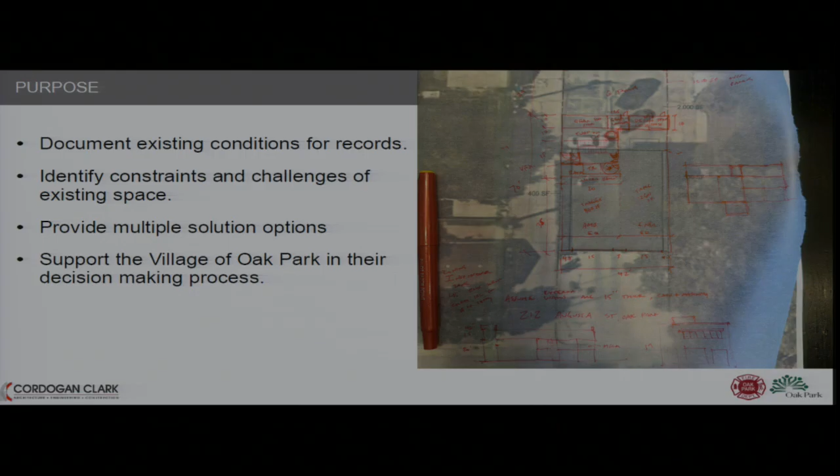Initially, the purpose really was to document the existing conditions of the building, to identify constraints and challenges of the existing space, and to look at multiple solution options, whether it was renovation, tear down, new construction on site, or new construction on a different site. Ultimately, the whole goal was to provide a list of options for the village to make their transparent decision on how they wanted to proceed.

Just a quick overview of the process. We came on board late last year and have been working with the village team and the fire department.

We started with a series of site visits of the existing building. We put together a questionnaire that was distributed to the fire department and some of the village team to get some initial feedback. Those questionnaires were then followed up with interviews with a few key people to follow up on any questions we had from the results.

Those meetings led into the development of what we call a needs/wants matrix, which I'll show you later from the report. That matrix helped us do our prioritization review with the fire department and the village to identify what components really were necessary versus what were wants for maybe a different site or a larger sized fire station.

Those all became pieces that we used to do our concept development. From there, we did concept tests where we looked at how those might fit on different sites and what that might allow or not allow. Then finally, all of that got rolled into the final report that we issued back in May.

So moving into our existing conditions review, we are talking about Fire Station 2 at 212 Augusta. A couple of images here of the current condition of the building on the exterior, and also want to note the site plan.

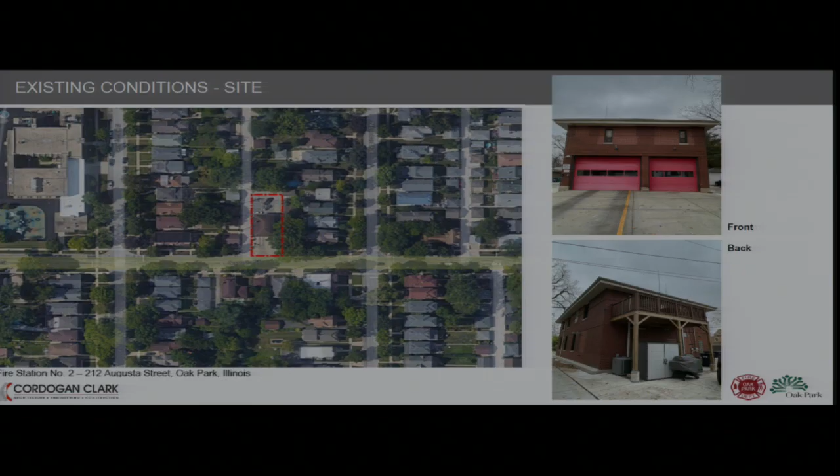There are 2 bays to the current station. However, neither bay can actually accommodate current safety equipment. The larger bay works with the engine that's there, but the smaller bay can't accommodate any other vehicles, and you are limited in your depth of bay as well. We'll get a bit more into that as we move through the conditions report.

It is a 2-story building with partial basement. We did develop a couple of plans for records just to identify some of our constraints and look at the space needs side of it. So we have those plans now built into the report.

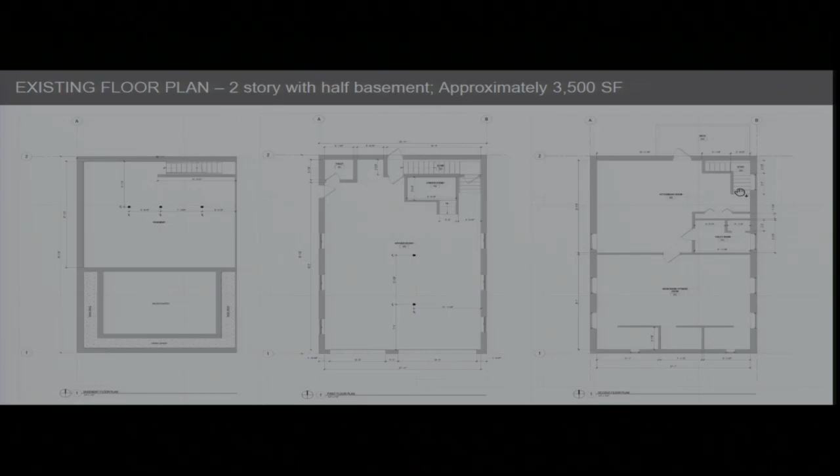I'm going to do a quick summary here of each floor. There are more things identified in the report itself; I'm just doing a snapshot here. Looking at the basement area, currently this partial basement, which is about half the footprint of the building, is where the cleaning area is, as well as safety equipment storage and a small workshop, along with most of the utilities - boiler, water heater - those kinds of functions that service the building.

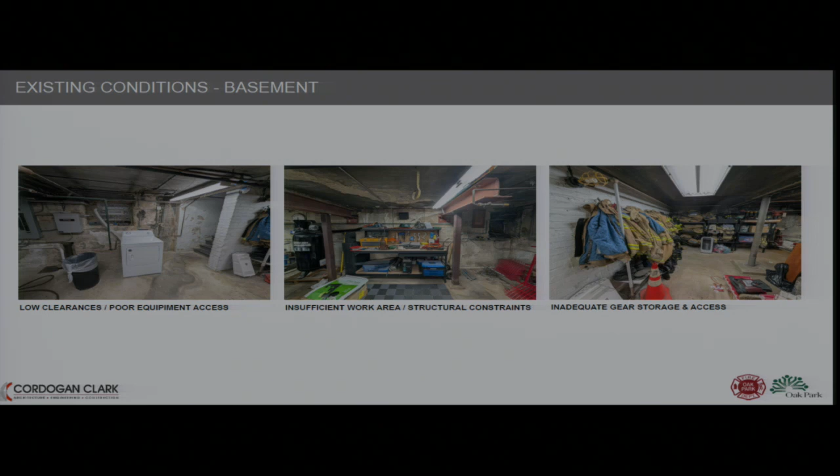Everything is very tight, and it is very low overhead. You also have a lot of gear being stored openly in areas that are difficult to reach and are not conducive for response activities of getting equipment and then getting onto the trucks. So there's a lot of inefficiencies in the layout, and there's also some practices that would not be used in a modern day fire station facility.

Moving to the main floor, this is your apparatus bay floor. As I mentioned earlier, there are 2 bays, but one of them is undersized for current vehicle use. So it's been repurposed for a fitness area, some weights and workout equipment. But if you look at that bottom right corner, that equipment is located directly next to your engine parking area.

There are concerns about safety from diesel engines. The engines do idle at times because they are diesel-based. There are exhaust systems in place to capture that and remove it from the building. However, having your fitness area or a public gathering space immediately adjacent to engines is not a preferred approach, and it would not be something done in a modern fire station.

The building itself has some structural limitations. The 2 photos on the left, you can start to see that there's very little clearance for a modern engine to park in this space. This building was built originally for horse and cart. There used to be a carriage house or a stable for horses in the back of the property, and this building was designed for a 1900s fire cart.

So very different needs have evolved over the life of the building. There are some structural components - like the second picture has the column that is very close to the engine, which makes it tricky for parking.

We want to avoid placing columns of this nature so close, because the engines now run upwards of several hundred thousand dollars. You don't want drivers rushing in and out having to worry about scratching or dinging access panels on that equipment, which is expensive to repair or replace. So in modern design, you'd move that structure further out or use a free structure design process.

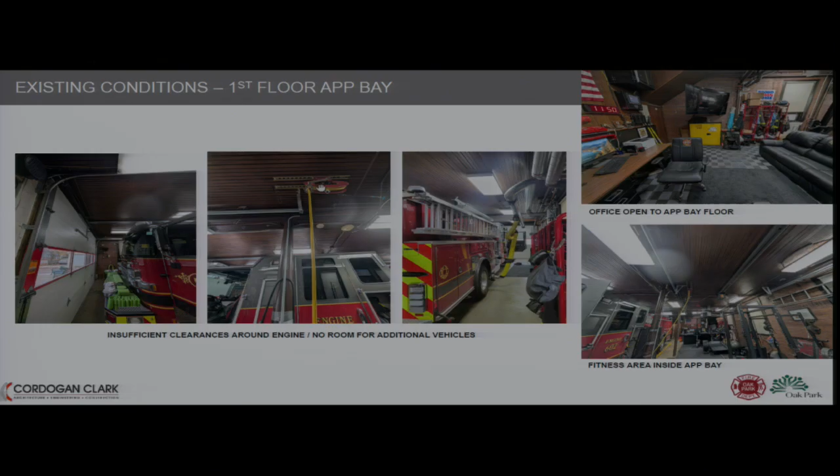Going to the second floor, the housing floor, it's a tight fit for the group there. They've made do with what they have, but the kitchen and day room area is undersized for the staff size we normally see. There's also an insufficient number of toilet fixtures.

There's one shower and one toilet on the housing floor, which would not be adequate in a modern design. The bunk room, while larger, isn't laid out efficiently. There's a lot of lost space up there for sleeping as well as congregating when off active hour. There are some inefficiencies in that space, making it a challenge to work within that confined area.

Also, locating housing on the second floor above an app bay, because of the potential carcinogenic components in the app bay, is not a desired approach. We typically try to look at one-story construction, or if two-story, we try to get the housing away from the app bay space in new construction and design.

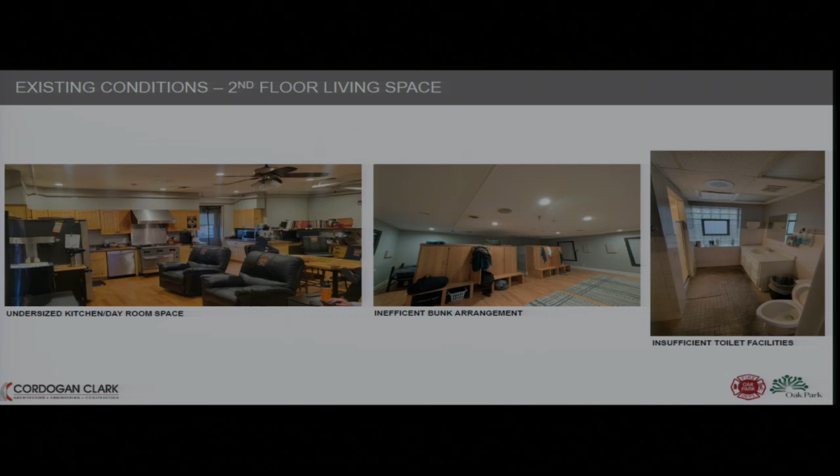Looking at the community side and supporting the community, there's a desire to add an advanced life support ambulance crew at this location, which the current building can't facilitate due to lack of opening width and app bay space for the ambulance. There's also a drive for overall station safety improvements for staff living there on a 24-hour cycle, and from the fire department side specifically, a recruitment and retention approach.

Illinois is one of 50 states, and they're all dealing with recruitment and retention issues. Every fire department is vying for a smaller pool of candidates, trying to attract and keep people working in the community to improve services, given that community service is a high goal the fire department identified.

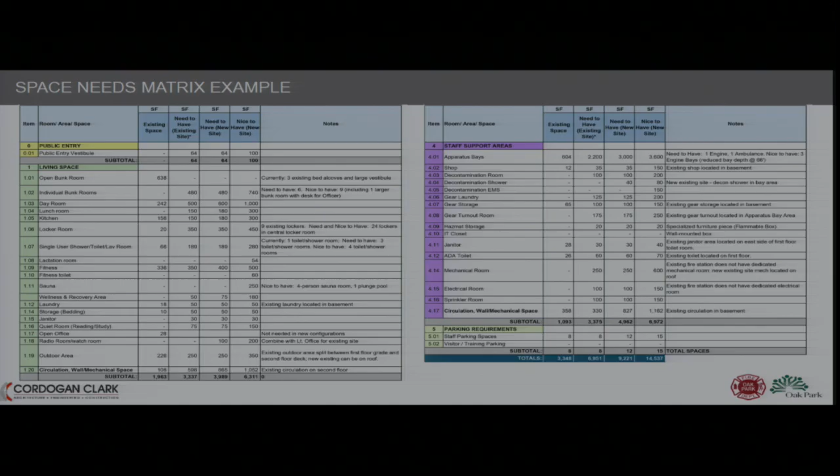The structure also has other limitations regarding its actual structural grid and footprint size, especially at the app bay level. There are several conversations we've had with the fire department about possibly demolishing the building and building new on the same site, because there are things that could be accomplished with a new building that cannot be readily provided by an addition or renovation to the existing structure, due to its current structure and footprint limitations. So using that as a stepping stone, we moved into some of our concepts.

I wanted to point out we're going to go over 3 of the concepts we're recommending as various options. We did look at up to 6 different options, but 3 of those got pulled out just as not very feasible, with better options available in the first 3. So we're going to present those 3 to you tonight.

So option 1 is looking at a new building on the existing site. We do increase the footprint of the building. We retain 8 parking spots on the north side because we need to manage some parking for staff change, as there's a shift rollover.

We also identify on this plan the size of a typical engine if it's pulled out from the bay for maintenance or any other cleaning or function that might need to happen outside the app bay area. The placement of the building is set back from the street to allow that fire engine to be contained within the property for the most part. It does overhang the easement a bit, but it won't intrude into the streetway itself. We had to look at every potential limitation on the site.

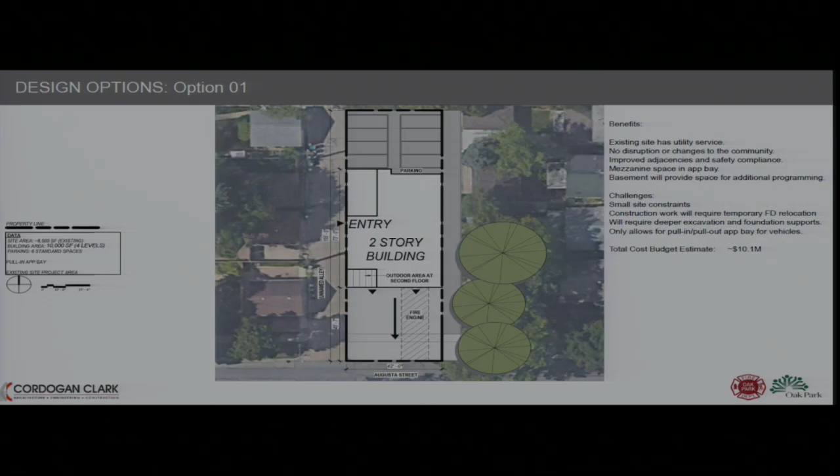This approach with the 2-story option does allow for existing utilities to stay in place, so that's a benefit. There wouldn't be any disruption to neighborhood communities by relocating a fire station to a different location. This area has always had a fire station, and in this scenario, it would maintain a fire station.

With a new design approach, you have the ability to improve your adjacencies and zoning separation that you don't currently have in the existing building. There are other benefits with the 2-story option, where we're able to locate some space for a mezzanine by increasing the height of the app bay. Also in this option, we're looking at adding a basement to add some of that extra square footage that's not available in the current footprint.

Some of the challenges, which are replicated throughout, is that it is still a 2-story building—we really can't get away from that with this site. Construction work will require a temporary relocation of the fire station itself to do the work, as there's not enough space on the site to move functions elsewhere and then do the work. There's just not enough footprint on the ground, and obviously we'll have to dig deeper excavation to do a full basement build out.

A quick overview of the plans for this particular approach.

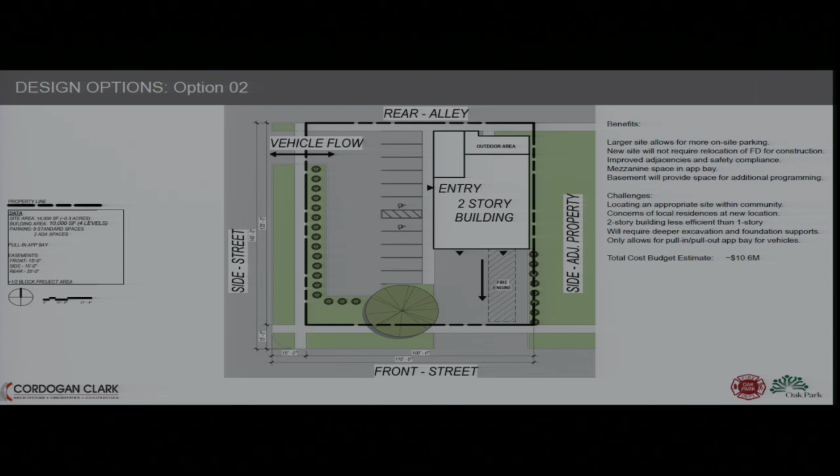The building plan itself is exactly the same in option 2. It's a 2-story with basement and mezzanine, a very similar layout. I think the only difference is that we moved a potential outdoor space to the roof of the second floor for fire department use.

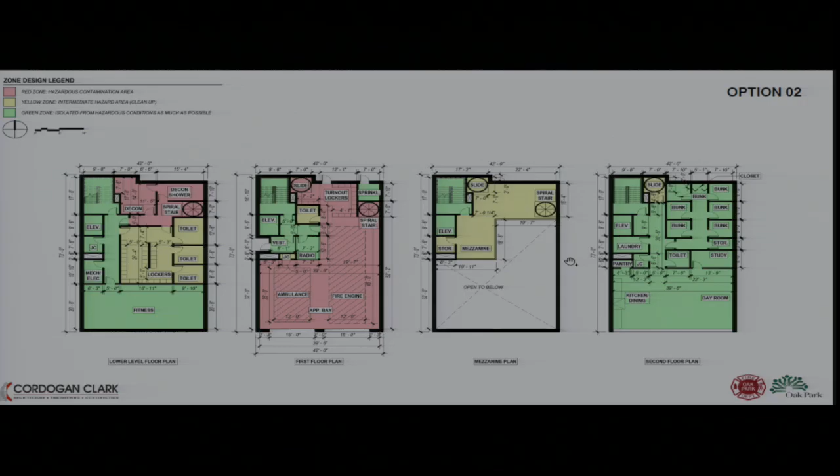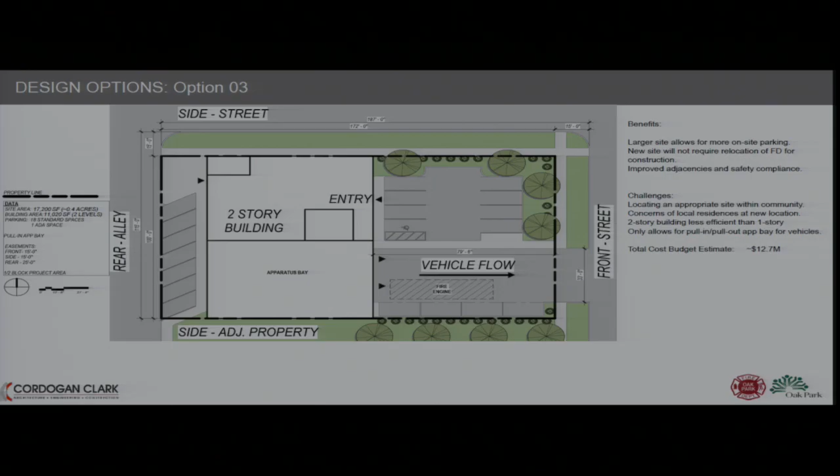And there would be more staff side parking and visitor parking within the site itself. The benefits, and I skipped this on option 2 and 3 since those would be new sites, is that the current firehouse could remain in operation while the new firehouse is being built and then transitioned over without too much interruption in service. But some negatives would be brand new utilities, new expansion, and locating the site within Oak Park. There's a lot of other components there to consider.

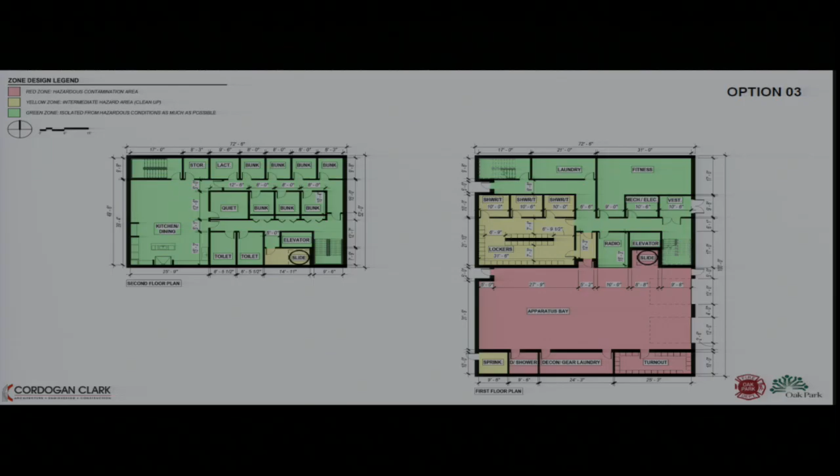That is our third option. I did put a slide here at the end that identifies the benefits and challenges of each option for further conversation, and that wraps up our presentation of the concepts.